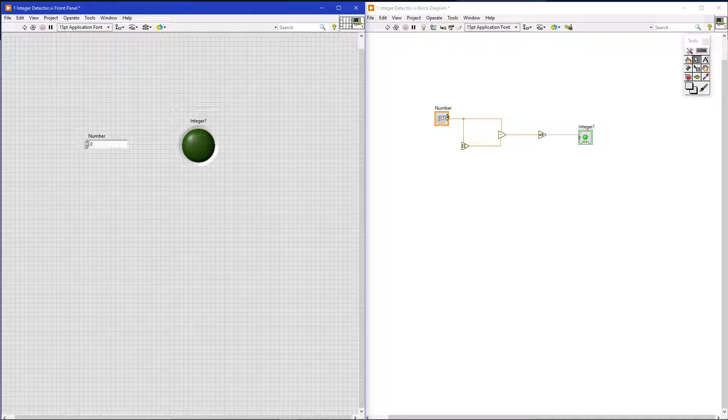Okay, so this is number one. This is the numeric controller here, and then obviously the LED. So here we have the numeric control, and I have it routed to a subtraction here. So what it does is it rounds to the nearest integer, so whatever number you put in, round to the nearest integer, and then I subtract that from the original input number, and then we check if that's equal to 0, and if it is, then the LED lights up.

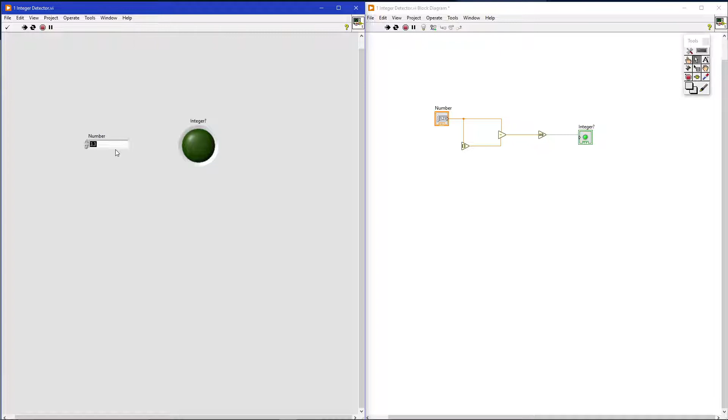So if we were to run this, obviously 0 works. 1, 2, 3, etc. But if we were to enter something like 3.3, it doesn't light up. Something bigger, I don't know, 1098.7, not an integer, but 1098 is. So that's that. Number 1.

Okay. Number 3 is next. So, alright, so this was the one we did in class, parallel resistors. Here you have your two input controls here, resistor 1 and R2. Then we take the reciprocal of each one and add them. We take the sum of each reciprocal, and then do a division, 1 over that sum. And then we have that output to this display right here.

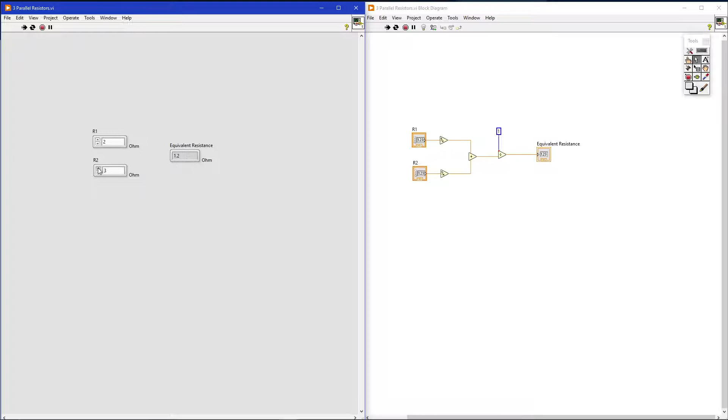So, if I were to put in 2 for each of these, we'd have 1 over 2 plus 1 over 2, and then do 1 over that. So that would look like, say, this. Yep, and that gets 1. And that checks out, and then change either of these, say, put this at 6, 1.5, and because it's a sum, if the other one was 6 and this one was 2, it would do the same thing. Yep. So that's number 3.

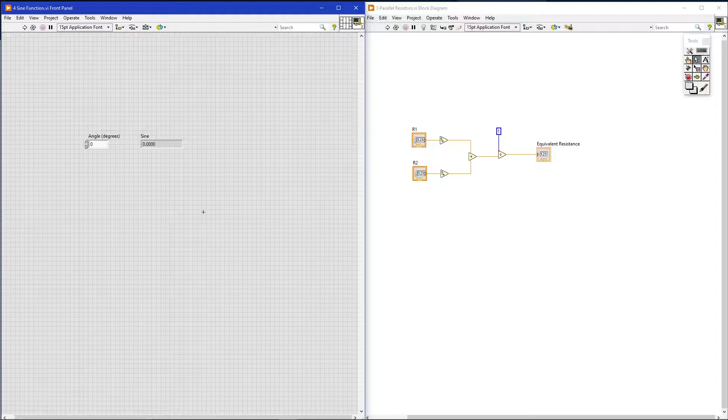Number 4 is the sine function. This one is pretty simple. Just have numeric control here, input your angle in degrees, and then through this function it converts it to radians, and then that radian output is sent to the sine function, which then just tells what the sine of that radian is.

So if we were to put in 45, that should be 0.707. So 45 degrees, and that's correct. And I have it set to round to 4 decimals, just because I think it looks nicer. So even if I were to put 90, it should be 1, still just 1.000. And I just did that by going into the properties, but that's not super important.

180 should be 0, and then 270 should be negative 1. Nope. 270. There we go. Yep. And 290 should be a little bit above negative 1, which it is. So that checks out. All right. Number 6.

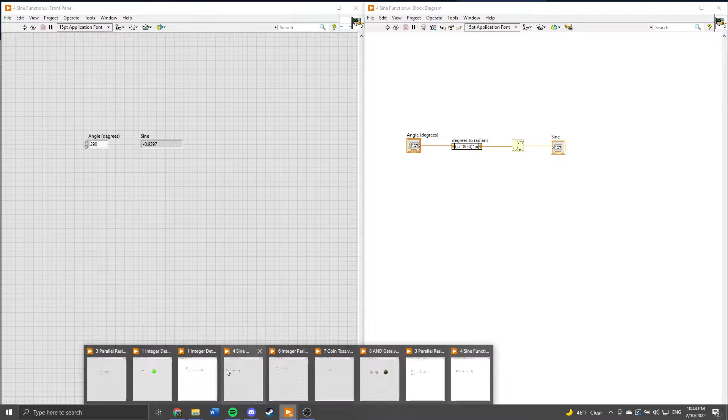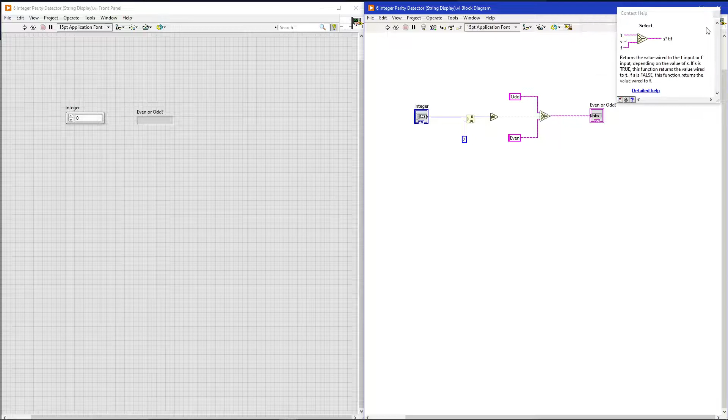Okay, so here we have an integer input, and then we divide it here by 2. And then we don't care about the quotient, so that doesn't go anywhere. But the remainder is output to here. We check if it's equal to 0. If it's not equal to 0, this sends a true signal here. And this is, I forget what this is called. The select, yeah. So this is a select function. So what it does, if it gets a true signal, it takes this and outputs it to this string output. Or if it's false, it takes this one.

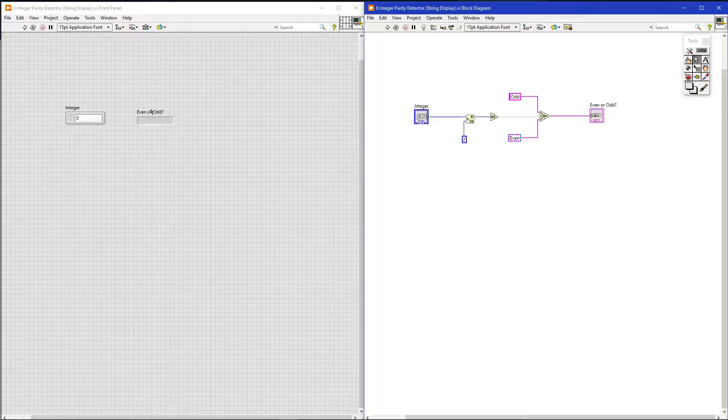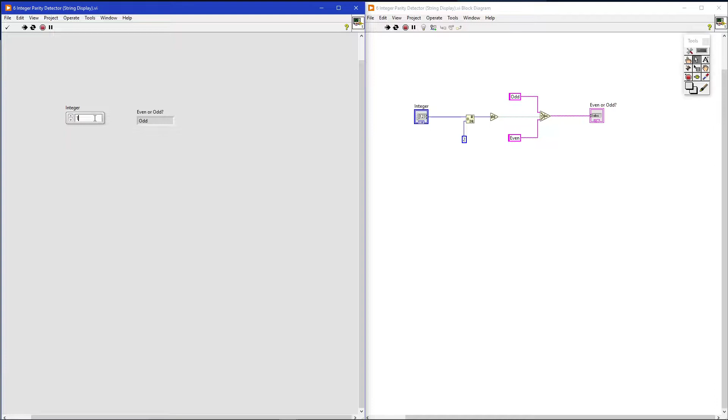So if we input, say, 2, we divide, the remainder would be 0. So it is true that it's equal to 0. So this would give us a false output here for not equal to 0. So yeah, even is the false. And 2 is an even number. So just to check that, let's see. Yep, 1 is odd, 2 is even, 3 is odd, 4 is even, and it continues. If you were to put a decimal, say 1.2, it just rounds down to the nearest integer. So yeah. Okay.

And 7. This one is just a coin flip. It's pretty simple. We have a random number generator here between 0 and 1. And then here, this is greater than or equal to. And so we're comparing if the number is greater than or equal to 0.5, then it sends a true signal to the select function, which sends out heads, which goes to here, and then here output tails if it's false, meaning it's less than 0.5.

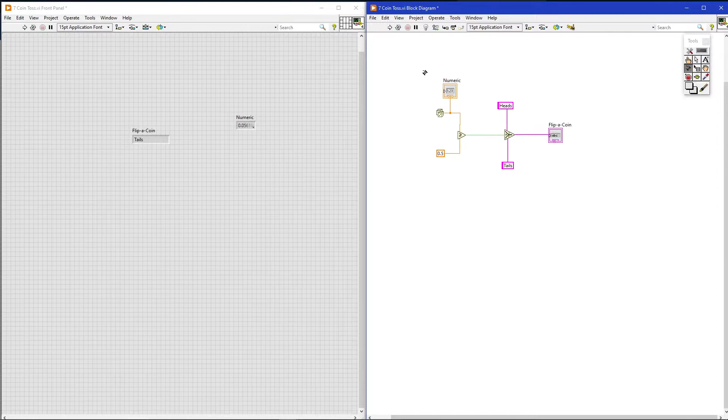So this one, there's no input or anything, it just runs. So we can have, okay, so that time we got tails, heads, tails, heads. And if you run it continuously, it just freaks out, which would make sense. And one thing I did just to make sure it was working was add a numeric indicator and wire that also to the random number generator, just to make sure that the number it's giving is actually greater than or equal to 0.5.

So here we got 0.05, so that's less than 0.5, and it gives us tails, which is correct. Do it again, 0.02, 0.6, that's greater than 0.5, so it should give heads, and it does. So that's good. And then finally, number 8.

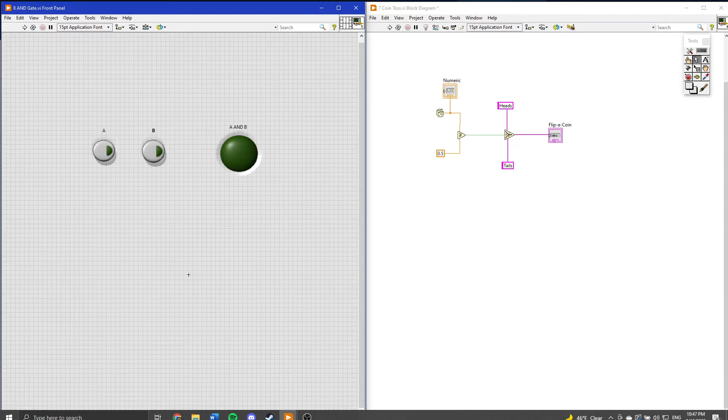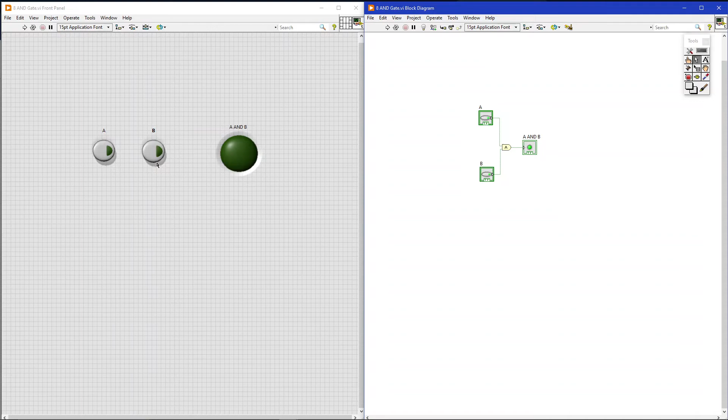Alright, cool. So this one is pretty simple. We just have A and B buttons wired up to an AND node here, and then it connects to this LED that lights up if this is true. So if A and B are both pressed, this should light up. And if one or neither of them is pressed, it shouldn't light up. So not lit, doesn't light up, but now if they're both pressed, it does. So that just tells if A and B are both on. And that's that. Alright, yep, that's it.